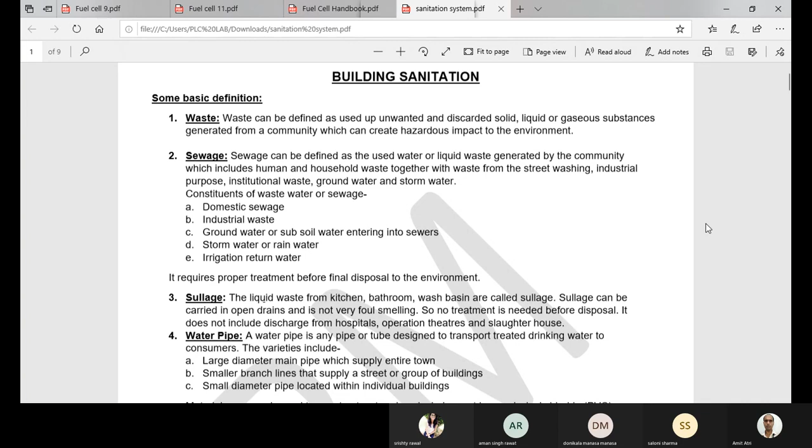And the next thing is the water pipe. So water pipe is any pipe or tube designed to transport treated drinking water to consumers - another basic facility. Now the Indian government is working at a very high level on this piped water supply system.

So the water that is treated, meaning it is pure, it is clean - the best or most suitable water that is considered drinkable. Because other uses like irrigation and harvesting type applications don't need that much high level of purity, but drinkable water means it is treated up to the standards.

Water pipe systems include a large diameter main pipe which supplies the entire town, then smaller branch lines that supply a street or group of buildings. It's distributed from central to other points, like a tree with a main trunk then branches, then smaller diameter pipes located within individual buildings.

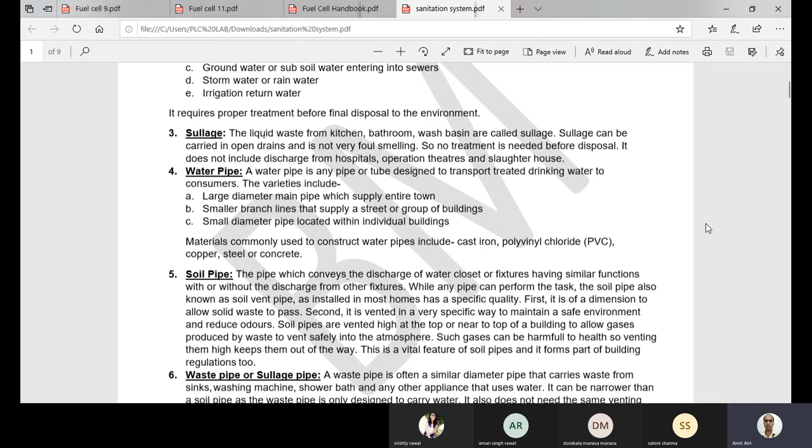Then soil pipe. What is a soil pipe? Basically the pipe which conveys the discharge of water closet or fixtures having similar functions, with or without the discharge from other fixtures. So it is conveying the discharge of water. It is not the supply line water, not the inlet, it is basically the outlet. It conveys discharge from water closets or fixtures.

While any pipe can perform the task, the soil pipe, also known as soil vent pipe, has a specific quality. In household areas, soil pipe is there because solid waste should pass.

Second, it is vented in a very specific way to maintain a safe environment and reduce odors. If the odor comes in a residential area, it will become highly undesirable and very unpleasant, in the commercial area as well.

So proper designing, proper path, proper exit, everything should be planned there. Otherwise, in case of a commercial area, the owner has to suffer, because customers will also not be approaching such a commercial area.

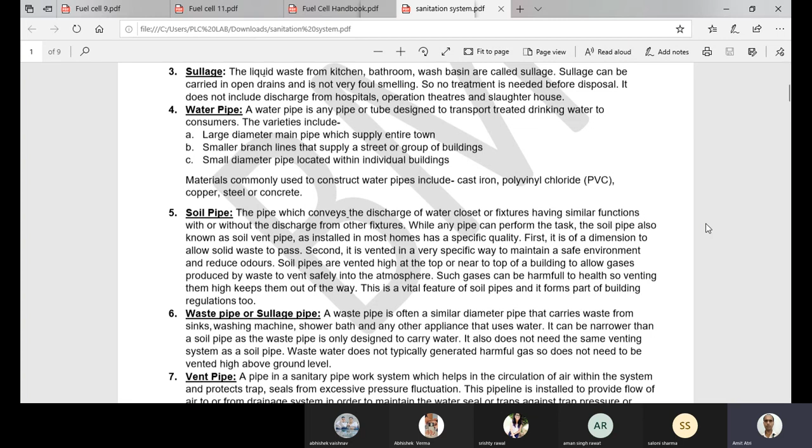This is a vital feature of soil pipes and it forms part of building regulations too. It is a basic need to maintain hygiene as well as the building's condition. Anything undesirable, we have to avoid. From the health point of view it will affect, and from the financial point of view, the value of the property will go down otherwise. So from every point we have to consider that proper waste management should be there.

Now, waste pipe or sullage pipe. What is it doing? It carries waste from sink, washing machine, shower bath, and any other appliance that uses water. So it can be narrower than a soil pipe. That is why a lattice is placed there - everywhere after in the bathroom, at the shower bath, or at the sinks and wash basins, lattices are placed so that only the liquid, the water, passes through and solid waste should not gather there. So the diameter of the pipe can be narrow because it is not carrying any type of solid waste.

It also does not need the same venting system as a soil pipe, because the gases produced from this wastewater or sullage water are not harmful, they are not unpleasant. Basically, we can consider that gases are not produced. So the venting system like that of a soil pipe is not needed.

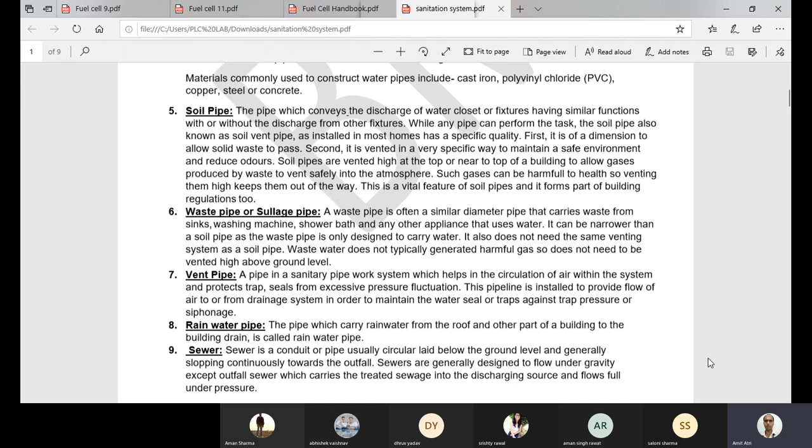Then, sewer. A sewer is a conduit or pipe, usually circular, laid below ground level and generally sloping continuously towards the outfall. One very important thing - the slope should be outwards, otherwise proper channel disposal and flow won't be maintained. Sewers are generally designed to flow under gravity, except outfall sewers, which carry the treated sewage into the discharging source and flow full under pressure. This is related to discharging - accumulation should not be there and a proper channel should be formed. Treated sewage means the harmful chemicals present in the sewage are treated at the sewage treatment plant, and after that it is discharged. This water will be disposed of, but it will not harm the environment.

The types of sewer are sanitary sewer and storm sewer. So what is sanitary sewer? It is a system of underground pipes that carries waste from bathrooms, sinks, kitchens and other plumbing components to a wastewater treatment plant where it is filtered.

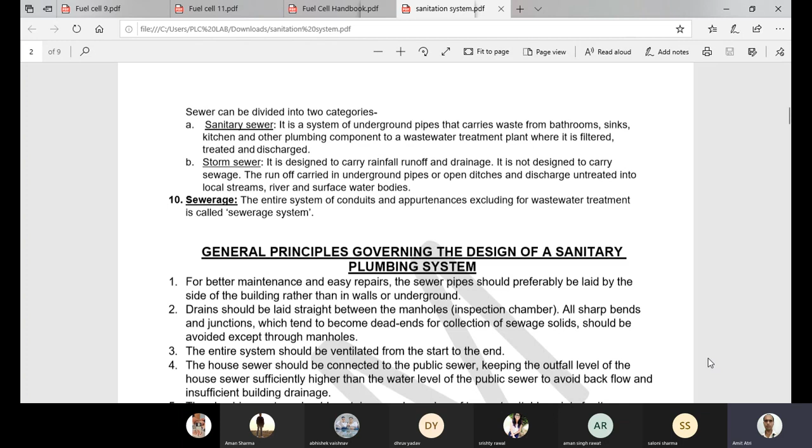Now, general principles governing the design of sanitary plumbing system. For better maintenance and easy repair, the sewer pipe should preferably be laid by the side of the building rather than in walls or underground.

Usually it is laid by the side only, it is not built in the walls, so maintenance and repair everything becomes easy. Since it is outside, we can easily check it and repair it in case of any fault.

Then drains should be laid straight between the manholes, so that through manholes we can inspect.

All sharp bends and junctions which tend to become dead ends for collection of sewage solids should be avoided, except through manholes, so blocking should not be there. Proper inspection should be easily available, that will only enable the proper discharge of this sanitary system.

The entire system should be ventilated from start to end, so as to not let the pressure exceed. That is why ventilation is needed - if proper ventilation is not there, creation of vacuum, pressure fluctuations, and many other undesirable situations can come up.

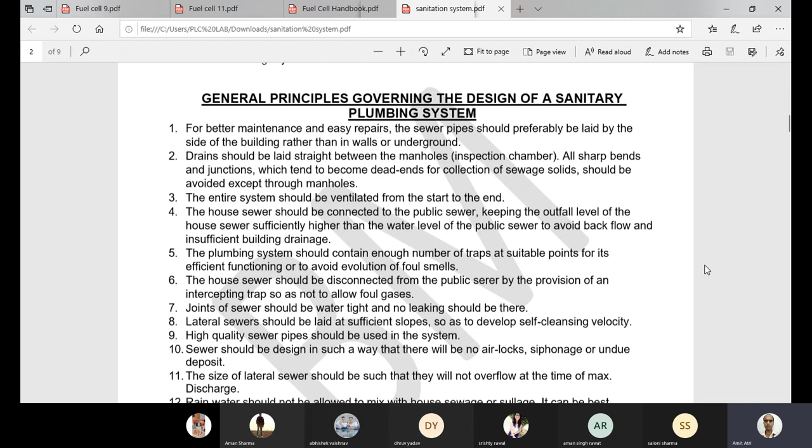Then joints of sewer should be watertight, no leakage should be there, for the same reason. Also, lateral sewers should be laid at sufficient slopes so as to develop self-cleansing velocity.

The slope should be maintained so as to maintain water flow from high to low. We can also see this in the household, in the bathroom - a similar layout. The vent pipe there is placed at a lower level, and the slope is made towards the vent pipe.

If the slope is on the other side, the vent pipe is relatively higher there in the bathroom, and the water won't go that side - it will accumulate in the bathroom. So proper slope should be maintained.

High quality sewer pipes should be used in the system. Otherwise the purpose is compromised, the operation won't be desirable, and it won't be long lasting. We'd need more replacement, more repairing, more maintenance.

Sewers should be designed so that there are no airlocks, siphonage, or undue deposits. Proper designing should not allow any deposits or airlocks. If blocking occurs, it will not solve the purpose, and proper disposal and discharge won't be maintained.

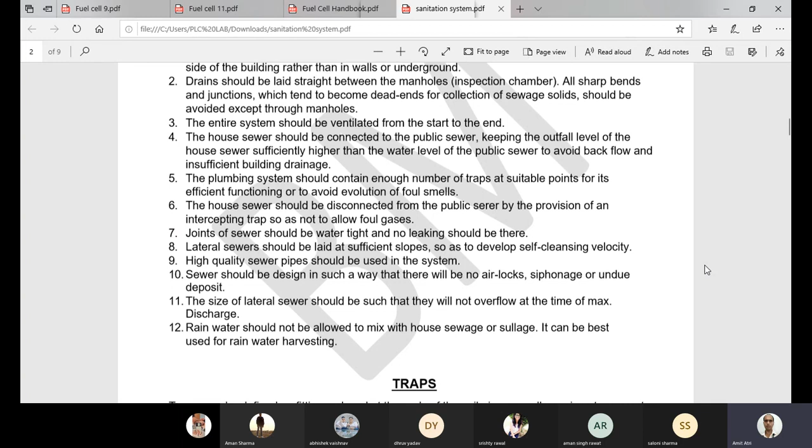On the other hand, we use pumps to pump out underground water for harvesting. So it is one of the requirements, an energy saving option as well as a water management program.

From the consumer side, the proper and efficient use of water is also needed. Otherwise, mismanagement or wastage of household water leads to several problems, even conflicts, especially in case of shortage of water. So from the customer's side, they should also assist and help along with the authority, the regulatory body.

Maintenance of hygiene is a two-way approach, not only from the management side. The customer or residents of a building should also contribute along with the authority: proper housekeeping, proper maintenance, proper cleaning, and proper waste disposal should all be there.

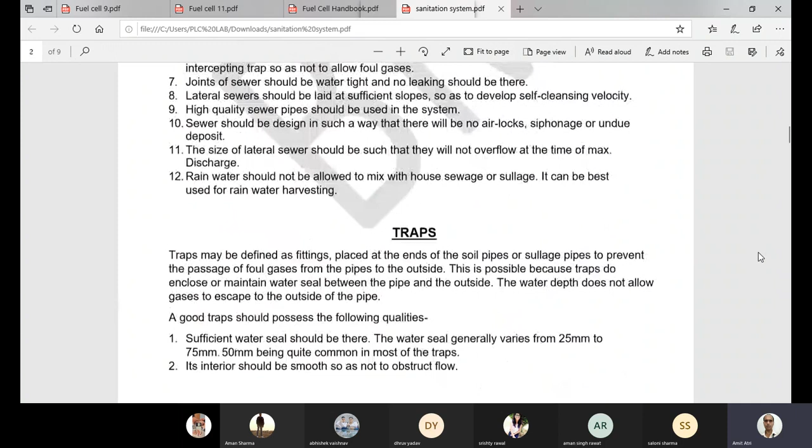A trap may be defined as a fitting placed at the ends of soil pipes or sullage pipes to prevent the passage of foul gases from the pipe to the outside. Because soil pipes are there, there should be proper sealing, so that the foul smell does not pass through, meaning there should be proper isolation.

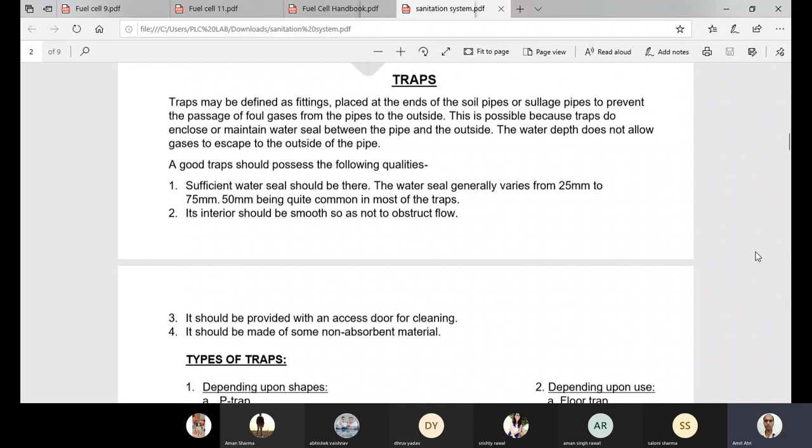This is possible because traps maintain a water seal between the pipe and the outside. Here, this is the water seal from the top to the lower level of the P-shaped trap. Similarly in the Q trap, the water level goes to the lower level of the trap. This is the water seal. Because of this water seal, any foul smell from the outlet won't reach the inlet.

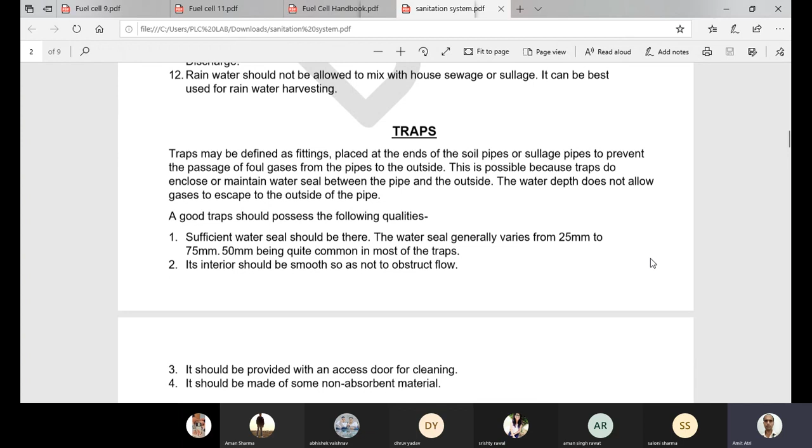Basically, a trap is just like a seal to block gas. A water trap does not allow gas to escape to the outside of the pipe. A good trap should possess sufficient water seal, which generally varies from 25 mm to 75 mm, with an average of 50 mm being very common.

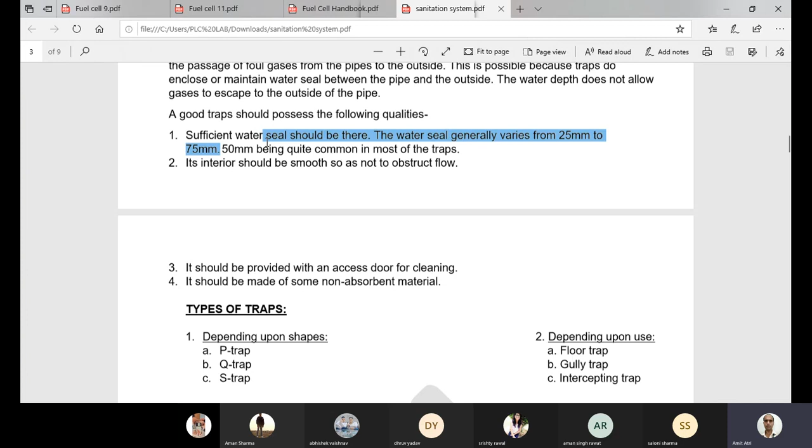Its interior should be smooth so as not to obstruct the flow. Obstruction to the flow should not be there, as that will lead to blocking, and proper disposal and discharge won't be maintained. It should also be provided with an access door for cleaning.

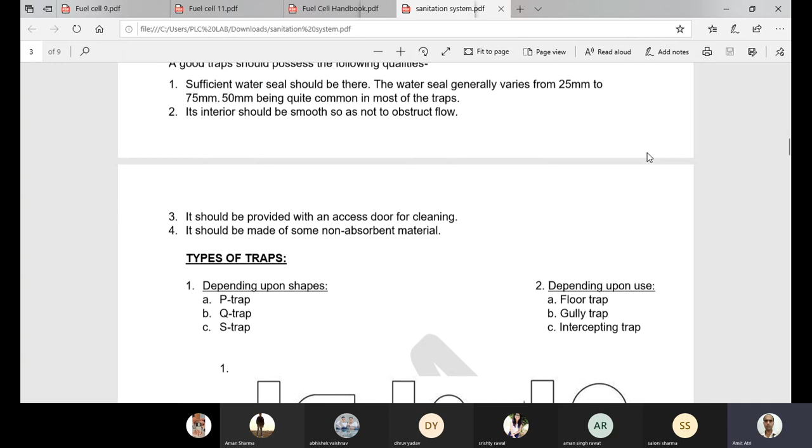It should be made of some non-absorbent material, otherwise it will start absorbing wastewater and accumulation will start there. The access door for cleaning means, from the maintenance point of view, maintenance should be very easy.

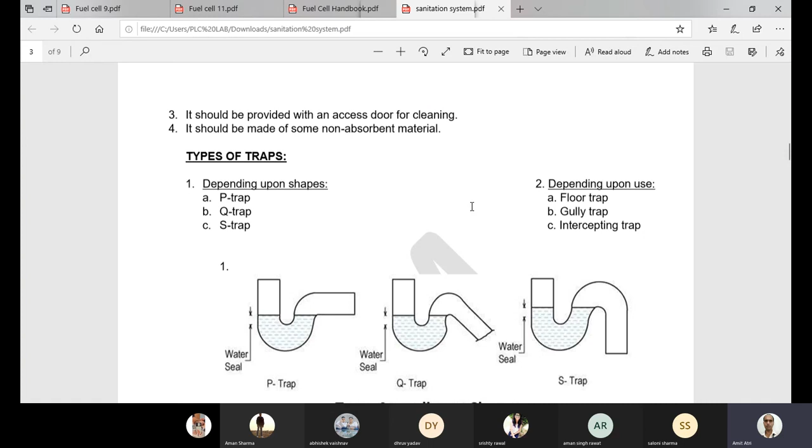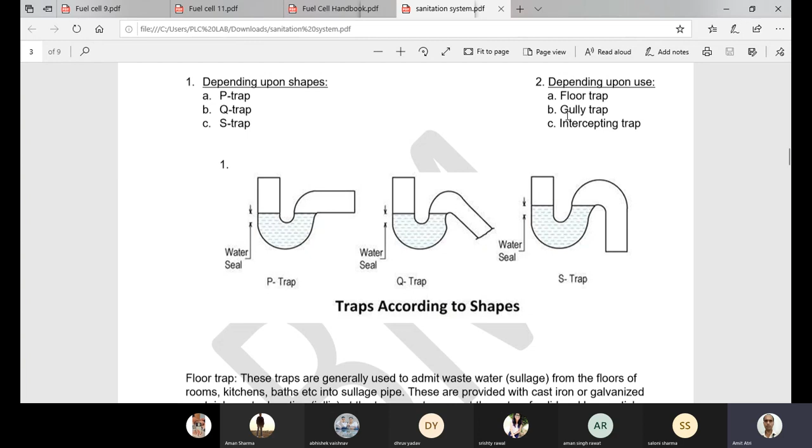So we have studied the types of traps. Another type of trap, depending on use, could be floor trap, gully trap, or intercepting trap. Here it is, the floor trap. They are used to admit wastewater, not soil waste, from the floors of rooms, kitchens, baths, etc., into the sullage pipe.

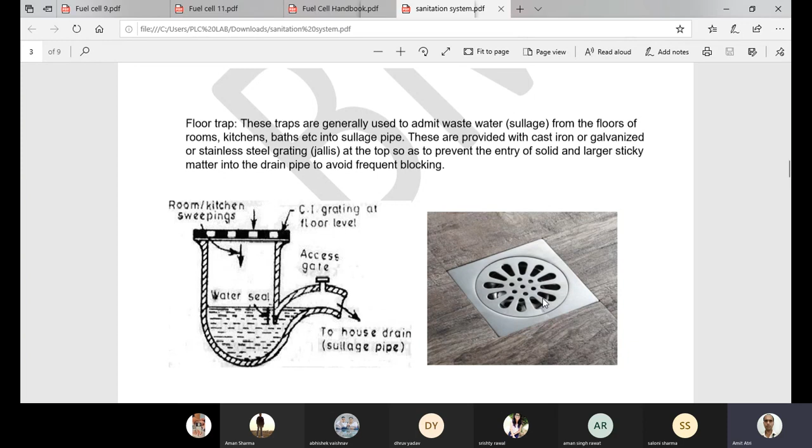This lattice is provided because solid waste should not go through this sullage pipe. These are provided with cast iron, galvanized, or stainless steel gratings, as shown at the top in this figure, so as to prevent the entry of solid or larger sticky material into the drain pipe and avoid frequent blocking. That is why the diameter and thickness of the pipe is less compared to that of a soil pipe.

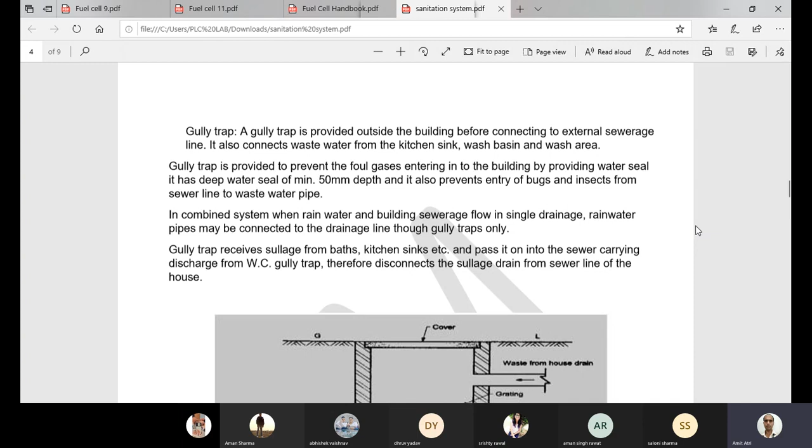Now gully trap. The gully trap is provided outside the building before it connects to the external sewerage line, meaning the main sewage line. The building is connected to that, and at the border there is a gully trap. It also connects wastewater from the kitchen sink, wash basin and wash area, so it is related to sullage, not soil waste. Gully trap is provided to prevent foul gases entering the building by providing water seals.

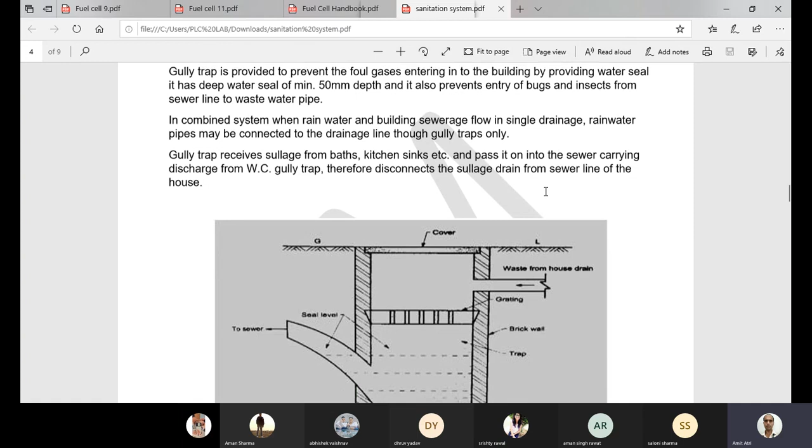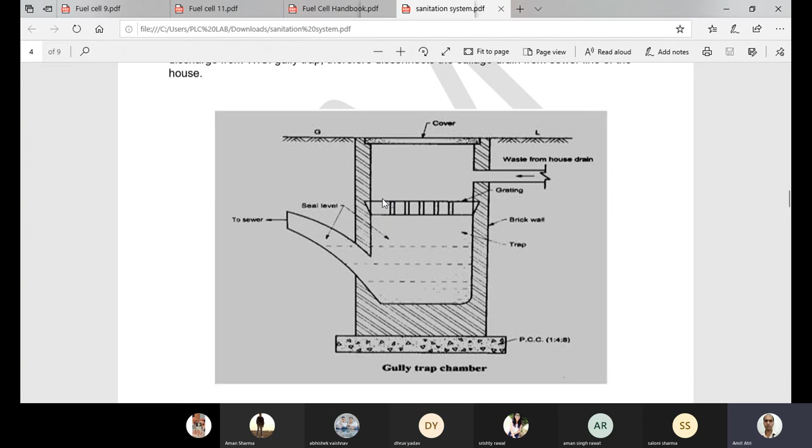Water seal is also there. Here we can see in this diagram the seal level, top to bottom. Now this is the trap. From one side there is a sewer, and from one side the waste from the house drain is entering here. Now grating is there, meaning solid waste won't be going through this channel.

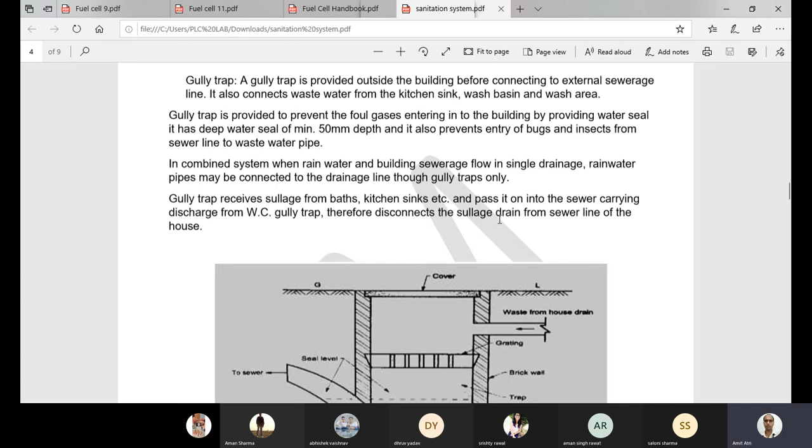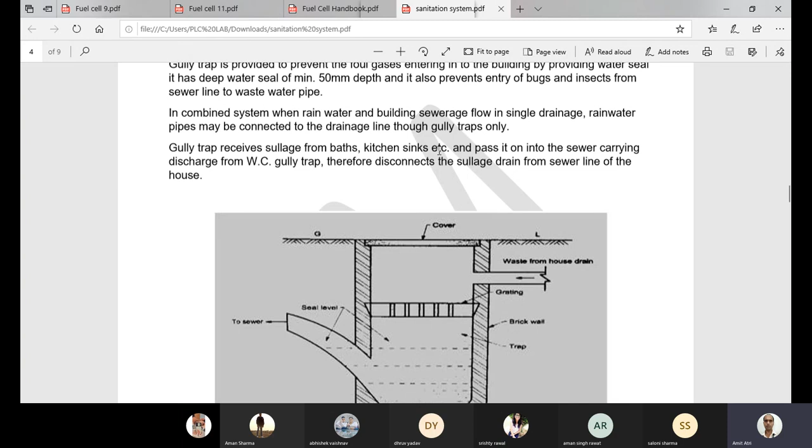In a combined system, when rainwater and building sewage flow in a single drainage, rainwater pipes may be connected to the drainage line through gully traps only. That means we can connect rainwater as well as the sewage flow line. Gully traps receive sullage from baths, kitchens, etc., kitchen sink. So it is related with sullage only, that is why the wastewater from the bathroom or the kitchen is being used there.

So a trap is needed. Backflow of water should not take place, and foul smells should not enter the house sewer, otherwise they will create an unpleasant environment in the house itself. So the intercepting trap is provided to prevent foul gases entering into the building sewer by providing a water seal. This trap is often provided in a small manhole constructed just near the house.

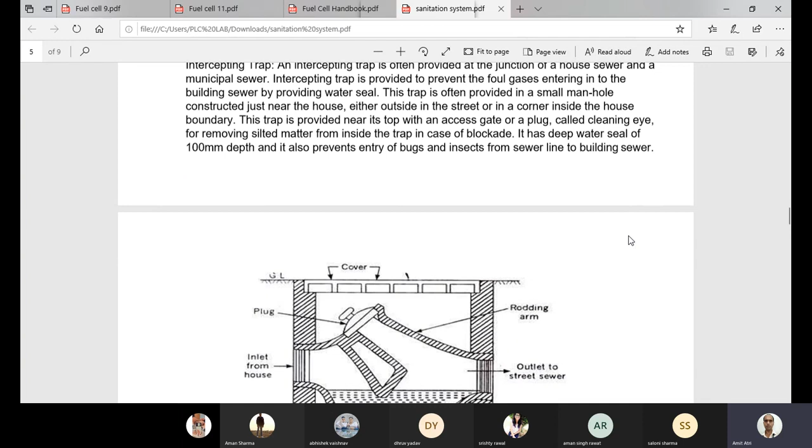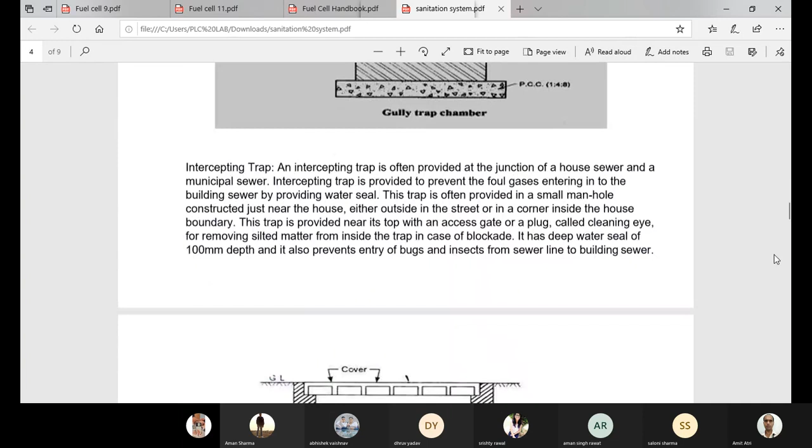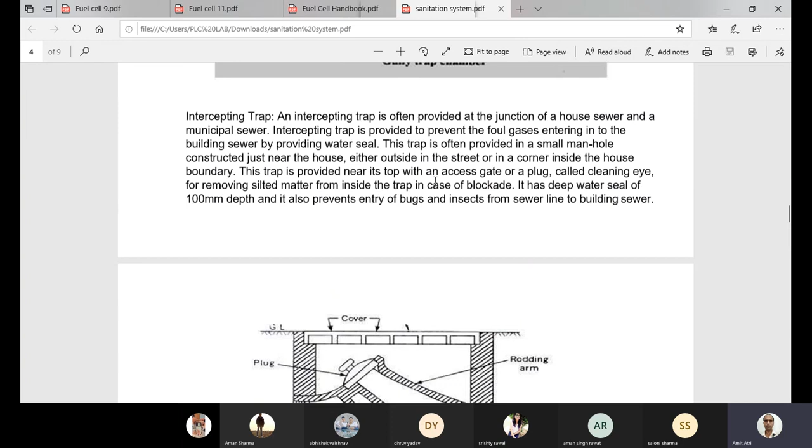Manhole, maintenance, inspection, everything can be provided here. Here is the cover - this is basically the manhole, the cover, and the plug. This trap is provided near its top with an access gate or plug called a cleaning eye, for removing silted matter from inside the trap in case of blockage. That means if the water flow is blocked, we can very easily clear the obstruction through this plug.

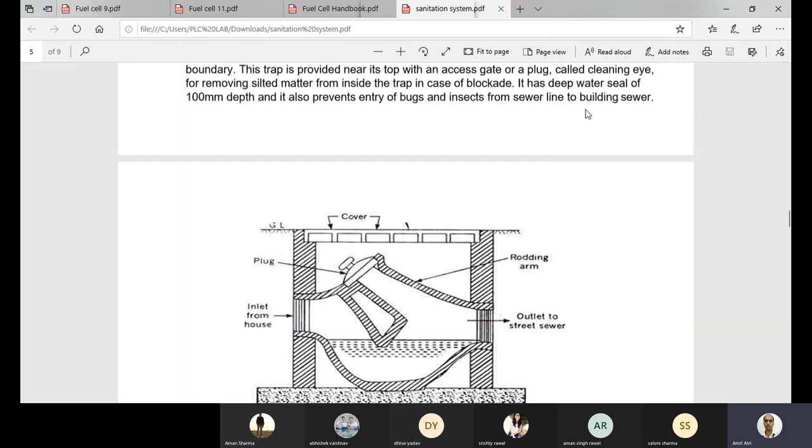It has a deep water seal of 100 mm depth, and it also prevents entry of bugs and insects. So through the water seal, bugs and insects won't be entering our system.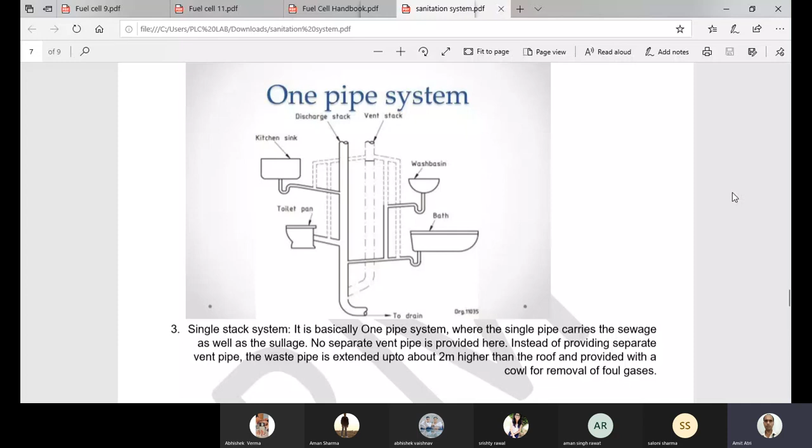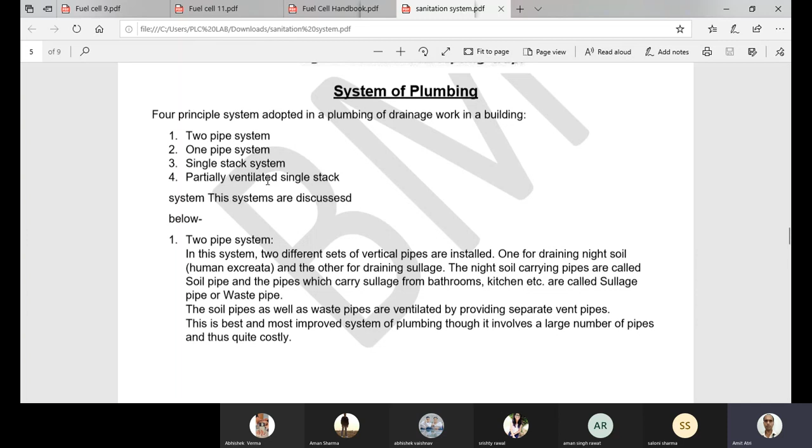Now coming to the system of plumbing. Some types of designs are here: two pipe system, one pipe system. Let us discuss them one by one. The four principal systems adopted in plumbing of drainage work in a building are: two pipe system, one pipe system, single stack system, and partially ventilated single stack system. Okay, so two pipe system - two different sets of vertical pipes.

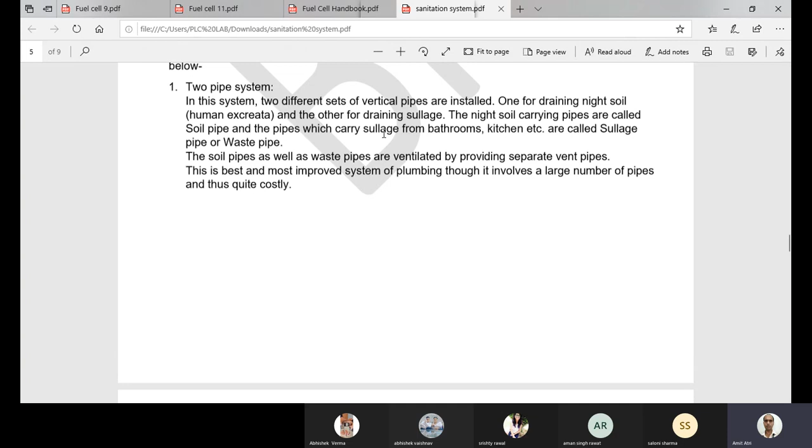For soil water and sullage water, different pipes are there, they won't be mixed. The night soil carrying pipes are called soil pipes, and the pipes which carry sullage from bathroom, kitchen, etc. are called sullage or waste pipes. This is something similar to what we studied, that solid waste won't be there in the sullage pipe system.

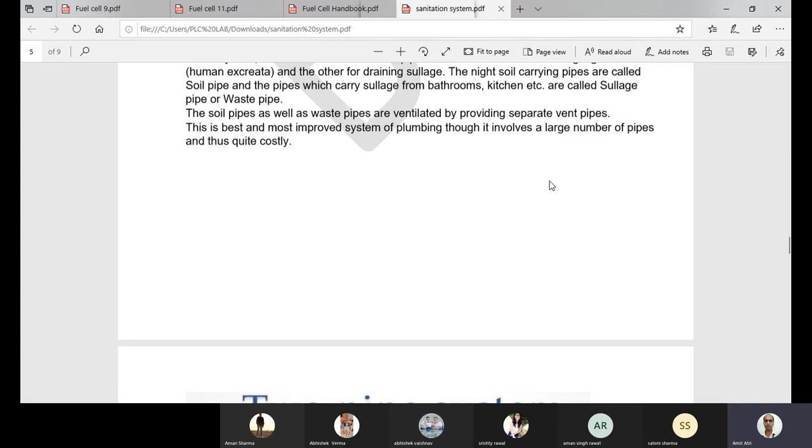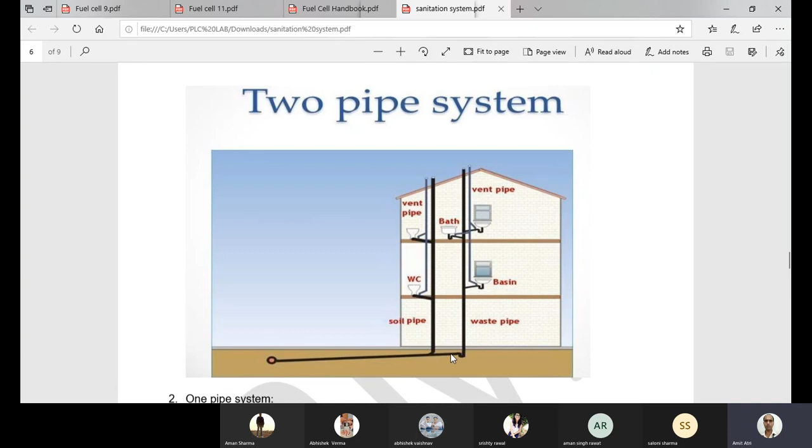The soil pipes as well as the waste pipes are ventilated by providing separate vent pipes, meaning they are totally different, not mixed anywhere. This is the best and most improved system of plumbing, but the number of pipes can increase, so the cost of installing such a plumbing system may increase. But it has the advantage that both the soil water and the sullage water will be isolated, they won't get mixed. So here we can see, first the soil pipe, next the waste pipe or sullage pipe - both of them are separate.

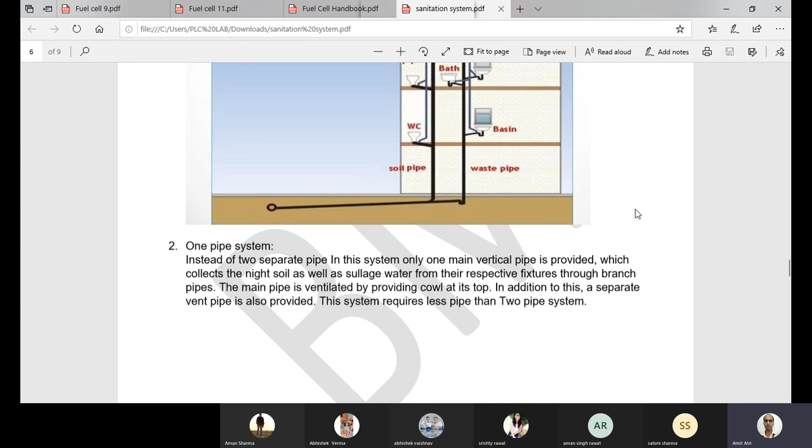Then, one pipe system: instead of two separate pipes in the system, only one main vertical pipe is provided. It connects both soil and sullage waste - for both types of waste, a single pipe is there. This main pipe is ventilated by providing a cowl at its top, so proper ventilation is needed. Backflow won't be there, water seal will be maintained.

And the foul smell will be ventilated through the cowl at the top. In addition to this, a separate vent pipe is also provided. So this system requires less pipe than the two pipe system.

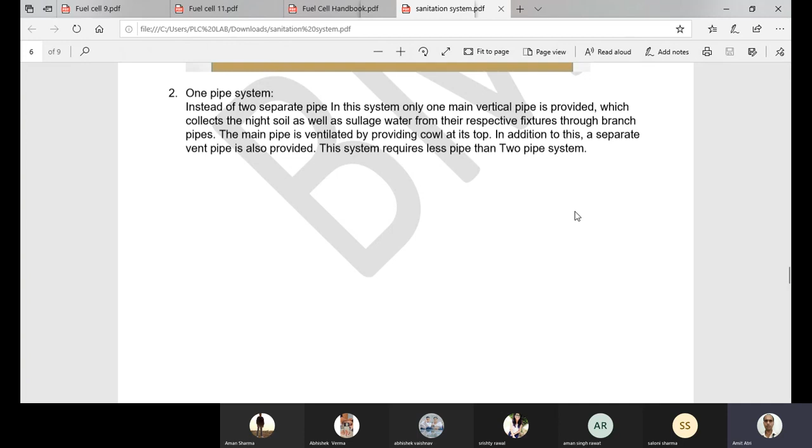So here is the vent, then here the discharge pipe which is going to the drain. So a single pipe system is being installed here.

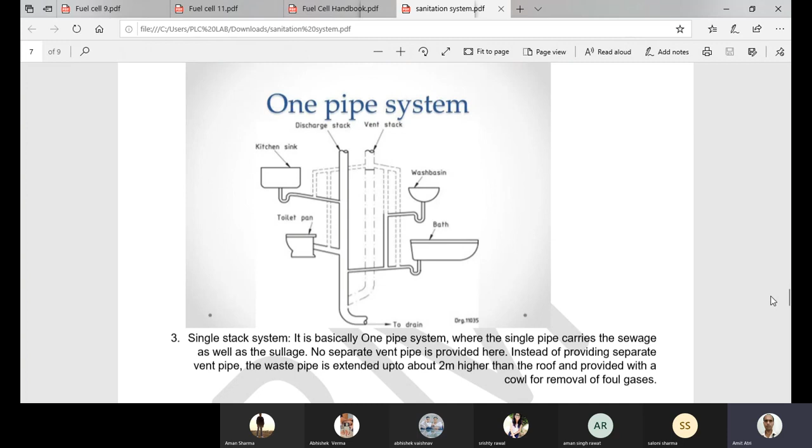Now, single stack system. It is basically a one pipe system where the single pipe carries the sewage as well as the sullage. Similar to this type of one pipe system, the single stack system is also there.

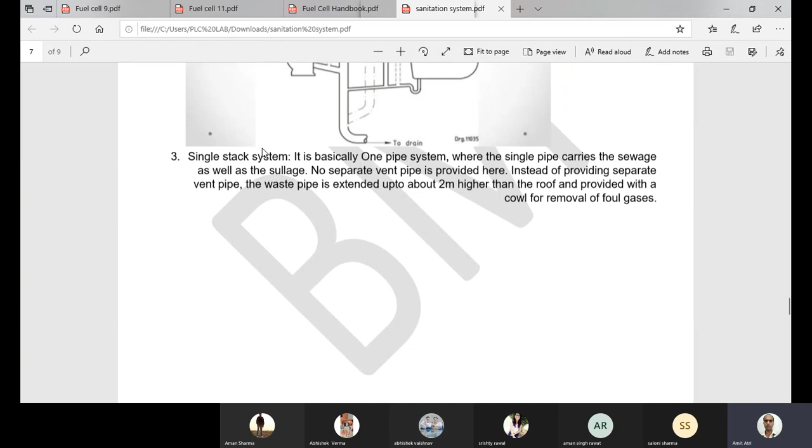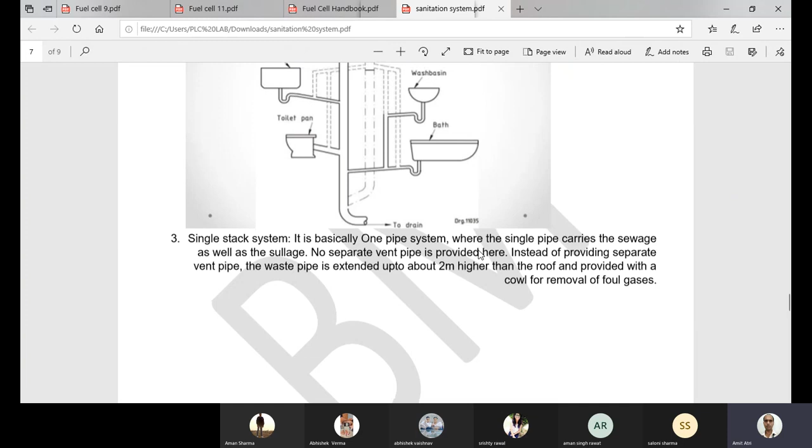Here we can see, but the separate vent pipe for ventilation is not provided here. Like here we are seeing a vent pipe is provided, but in the case of single stack system, there is only one pipe and another vent pipe is not provided. Instead, the ventilation is provided at the rooftop.

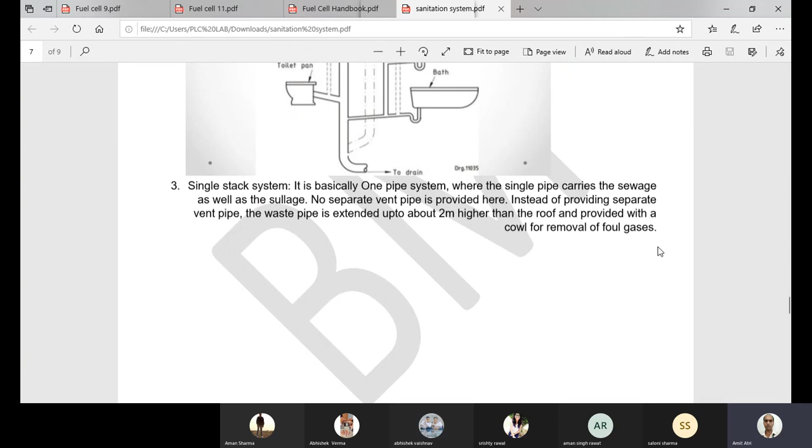Like here, air vent, single pipe is here. One single pipe and ventilation is through this rooftop.

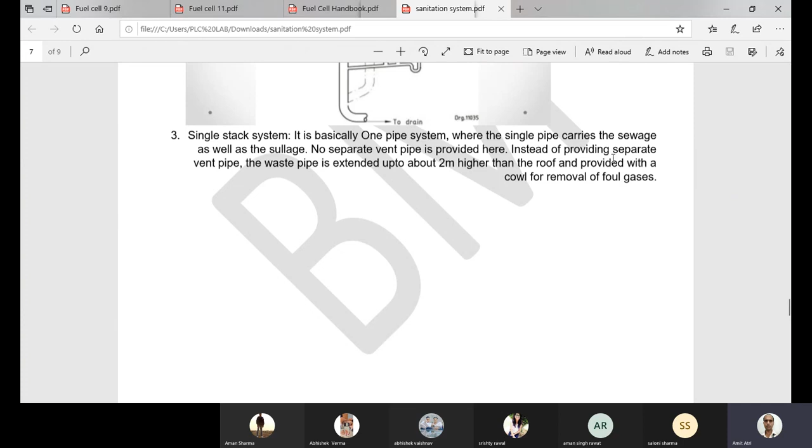It is provided with a cowl for removal of foul gases. This means one single pipe system is there, and this cowl is at the air vent, given a height above the roof height, about 2 meters approximately.

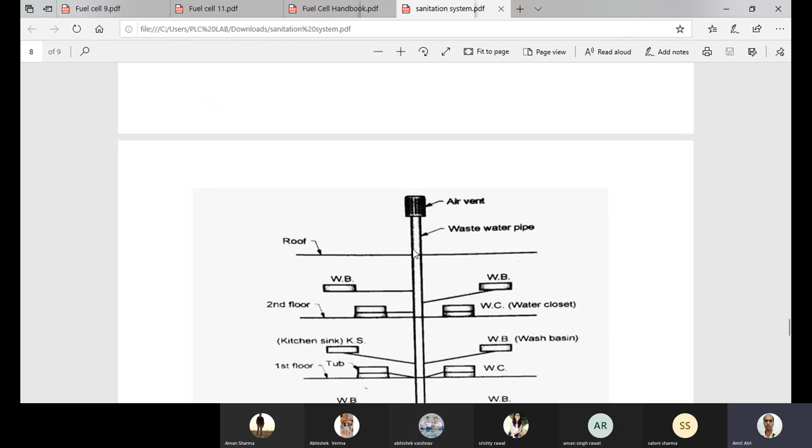2 meters higher than the roof. So here it is 2 meters higher, and here the vent arrangement is being provided. So basically the system covers ground floor, first floor, second floor. Here we can see.

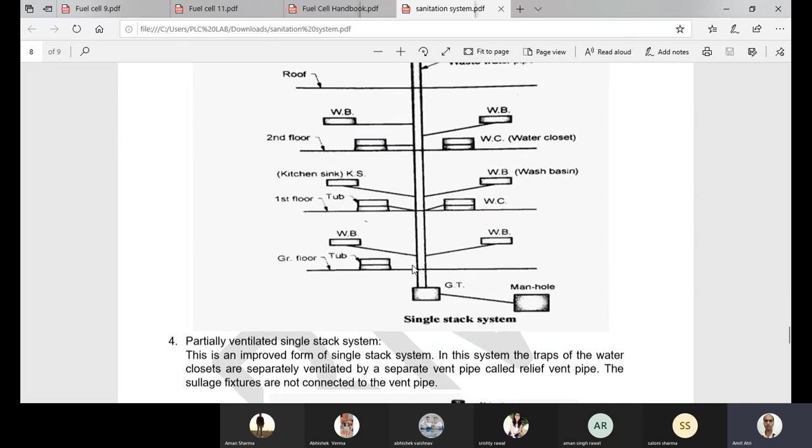Then last is the partially ventilated single stack system. This is an improved form of the single stack system. In this system, the traps of the water closets are separately ventilated by a separate vent pipe called the relief vent pipe. So one vent pipe is being installed here.

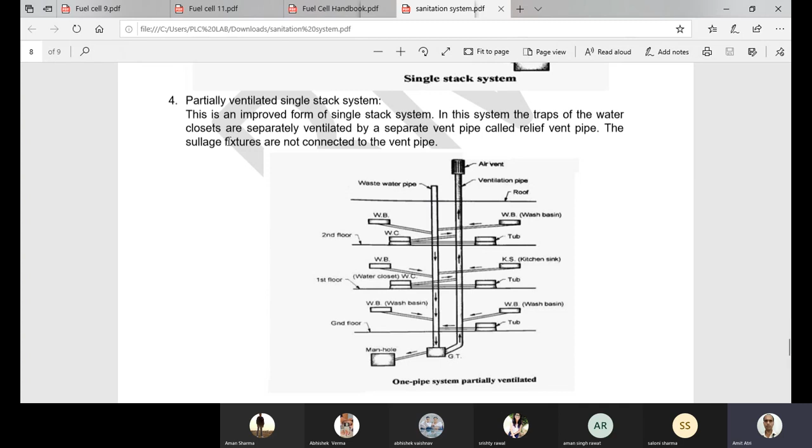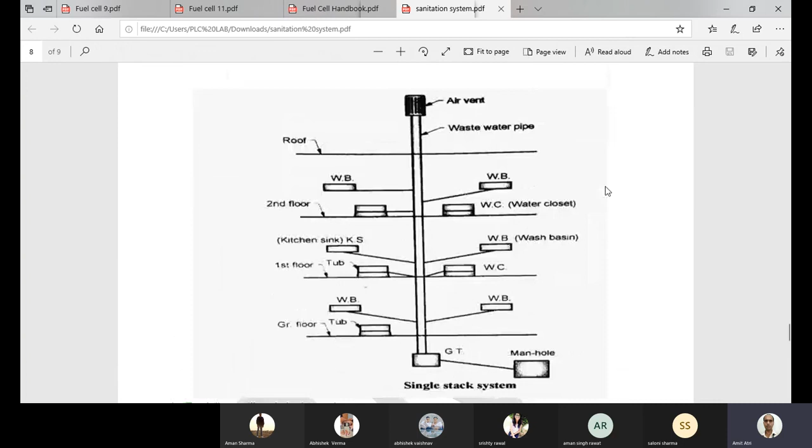So a single stack system is already installed, and along with that, a ventilation pipe is being installed here. The sullage fixtures are not connected to the vent pipe. So these are minor modifications done in this system, here to the waste pipe.

Now, last is the testing of the house sewer. After the installation of the house sewer, it is tested to make sure of the water tightness of the joints. That is the trap which we have built, and that should be tested here. The types of tests include the air test, hydraulic test or water test, and last is the smoke test.

The air test is generally used to test underground and vertical pipes. In this test, the particular section of the pipe to be tested is plugged at the upper and lower ends. This means we have plugged both ends of the pipe and are forcing air into the pipe with the help of a pump. Ends are blocked and air is forced.

Then all the joints are coated with a soap solution. So what will happen if there is any type of leakage? The air being blown inside through the pump will come out, so bubbles will form at the joints, indicating that air is leaking. Through that, the leakage can be diagnosed and detected, and then it can be repaired.

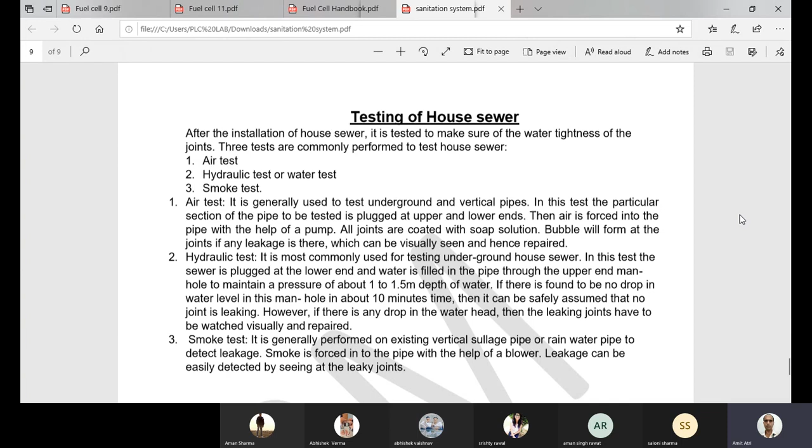Now the hydraulic test. It is most commonly used for testing underground house sewers. In this test, the sewer is plugged at the lower end, and water is filled in the pipe through the upper end manhole to maintain a pressure of about 1 to 1.5m depth of water. This means the outlet or exit end is blocked, and through the input or inlet end of the pipe, water is filled, and this specific amount of pressure is maintained.

If there is no drop in the water level for 10 minutes, it means there is no leakage, because if there were any leakage from the input end to the outlet end, the water level would slowly start decreasing as water leaks out at some middle point. So check the water level for 10 minutes; if it's the same, there is no leakage, since our outlet is already blocked. But if the water is leaking out, then we need to watch the joints, and they have to be repaired.

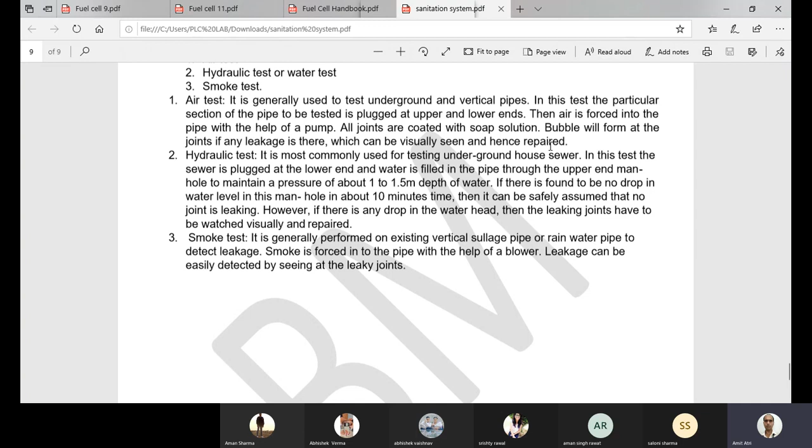Last is the smoke test. It is performed on existing vertical sullage pipes or rainwater pipes, so the vertical pipe, not the underground one. For underground pipes we use the air test or hydraulic test, but for the vertical pipe there is the smoke test. Smoke is forced into the pipe with the help of a blower. At any joint which is leaking, smoke will come out from there, so visually we can detect smoke coming out from that joint, and it can be diagnosed.

So that is sufficient for this topic regarding water supply and sanitation.